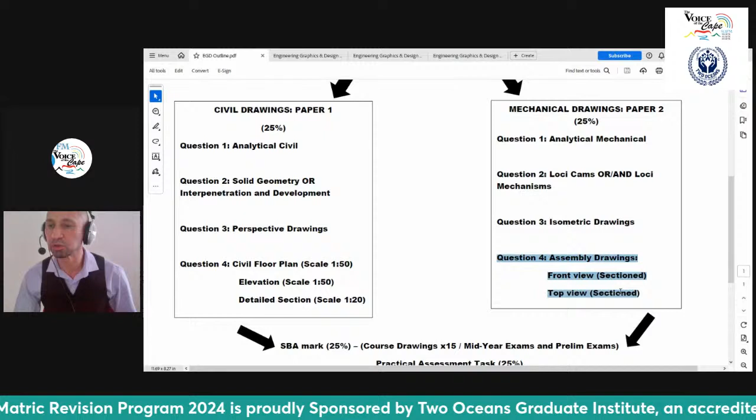which is also just short of 45% of the paper. So it's very important that grade 12s must engage with this particular question and spend at least an hour and a half on this question because of the magnitude of the mark that we have in this particular paper for this particular question.

And you will see you can either get a front view, which is going to be section, and then there will be either a top view, or it can be a front view with a left view, a front view with a right view. So mostly, if you look at papers, there will be two views asked, either a front or a top, or front or left, or front or right.

Very seldom will they ask three views because it takes up quite a bit of time for you to be able to do three views. And if they do ask three views, then of course the drawing will be much simpler and you will only have one cut section. So today we will sample one of the drawings. So I'm going to just go and touch on isometric drawings first.

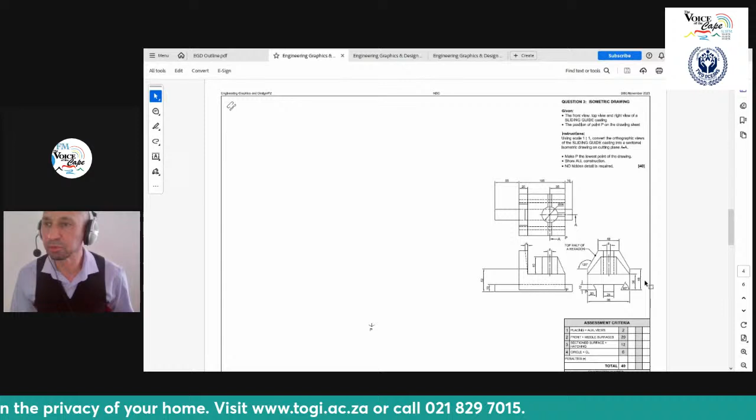So I've taken this particular isometric drawing, which is from 2023, which is last year's paper. Now, if you look at the drawing that was asked last year, I want to read the information to you so that you can merely skim read tomorrow, because the information in the instruction is pretty much the same. So you don't need to do hard analysis once you have done maybe one or two of these in the past, or do it as a revision.

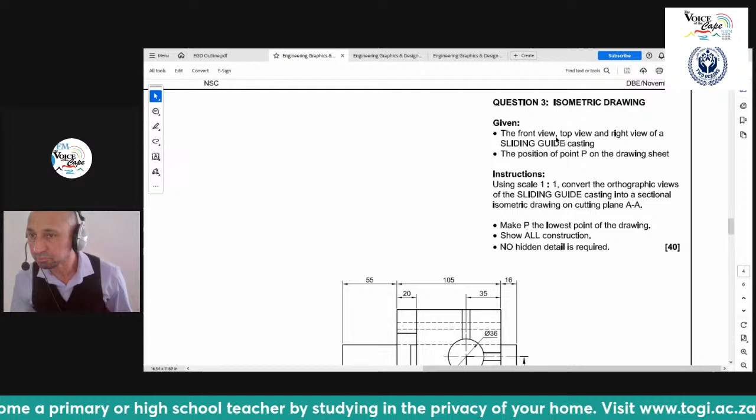So what is given to you, and please analyze that there's a front view, and you need to know where the front view is. This here, learners, is the front view, and I actually want to sort of label it there that is the front view, because this is how you are actually going to ensure that you understand it well. So that is your front view that you will see here. And then, of course, you will have a top view, which is this over here.

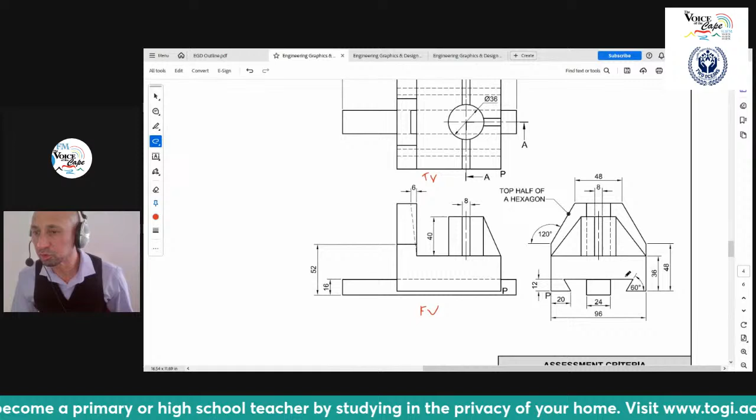That's your top view, because it is in third angle orthographic projection, and it means that the top view is actually at the top. Okay, so that's your top view that you will see here. And then it says here there is a right view, which is on the right-hand side of your front view. So that here will be your RV, which is your right view.

And for you to understand it like this, it gives you some sort of an idea of what you are busy with and how perhaps the different parts are formulated, so that you can unravel it and be able to put it in a drawing. And then it continues where it says here, it is a sliding guide, of course, a casting. And then the position of point P has been given to you. So you're going to find point P right here at the bottom. That's where point P is. And you can see there are starter lines.

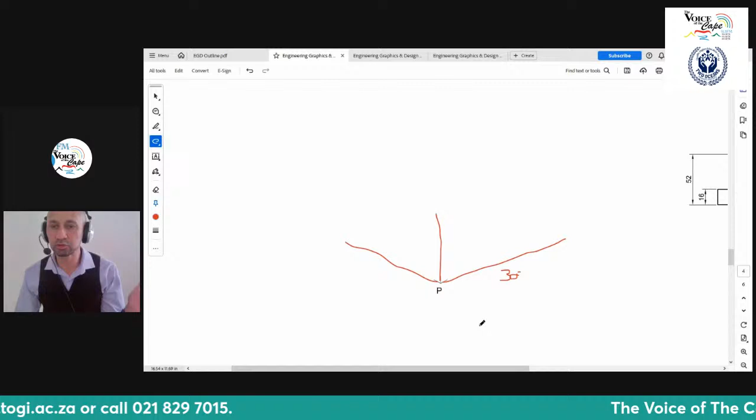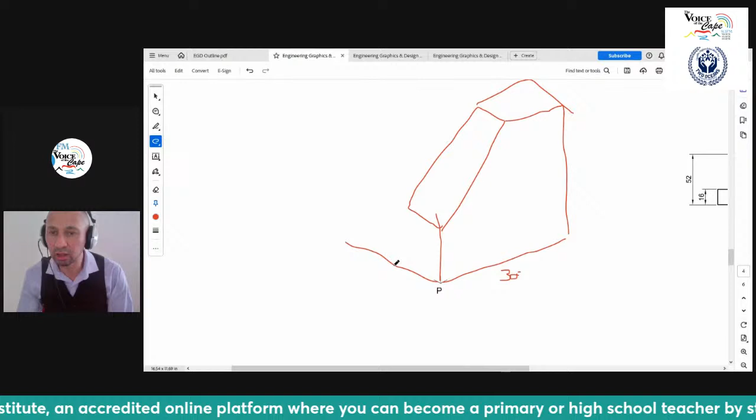Now, the wonderful thing about isometric drawings is that the lines can only go to the right at a 30 degree angle, or to the left at 30 degrees, or straight up. So those are isometric lines: 30 degrees to the left, 30 degrees to the right, or straight. In very odd cases, you're going to have non-isometric lines where you're going to have slants, for example, which I'm drawing right here at the moment. That is just a sample. So all these lines are all parallel, either to the 30 degrees that way or 30 degrees this way. And then you will have the non-isometric lines, which you will see here. Okay, so that is basic information that you need to know.

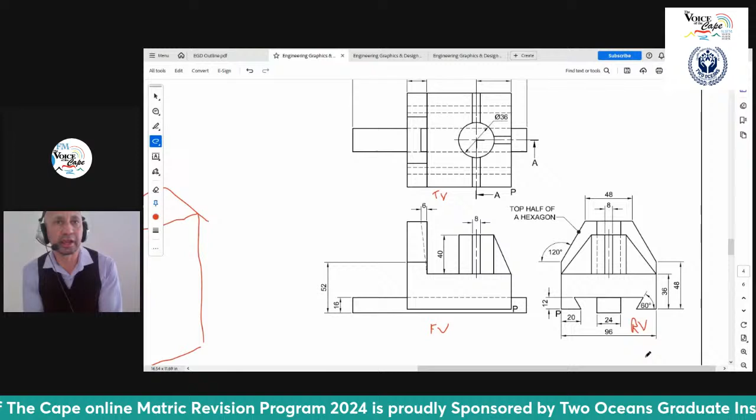Now, if you look at this particular drawing here, don't just start. Please look at it, analyze it, make sure you understand it really well before you actually start drawing. It is important for you to plan this drawing for at least 5 to 7 minutes, and don't rush it. And when you do the planning of maybe between 5 and 7 minutes, even up to 10 minutes, and you understand what needs to happen, then you will make up that time drawing it, because you know exactly what to do. And your planning can even be sketching.

Make a little sketch here, and you don't even need to erase it. You can just leave it there, because we understand as markers that learners do planning on their page and they can't take extra pages into the exam. So if they do a bit of rough sketching, maybe here on the side, we understand that. We're not going to mark you down for that.

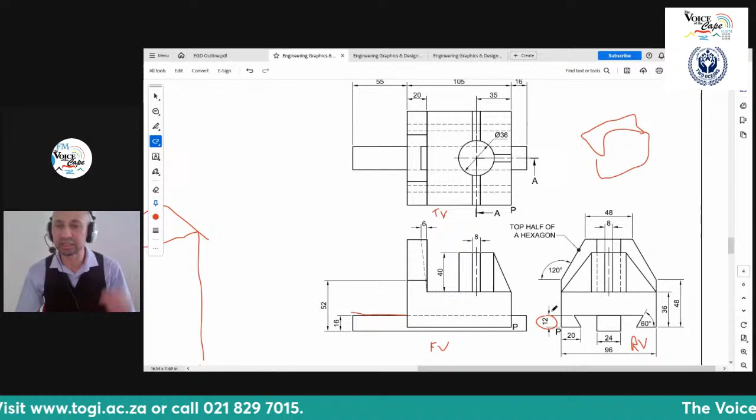What is very important is to look at the different dimensions, as you can see here, and analyze the different dimensions. Sometimes you will need to look at this dimension over here from here to there, but you won't find it here; you need to scroll up and make sense of the dimensions that link up with that specific part. So it's all about coordination. Anything that you can't find here must be transferred from maybe this view, where you will see that that part there is in fact 12. And the arrows will indicate exactly where it starts and where it finishes.

Okay, so that's important. And you've got to make the correlation: there is an upright part here, which is that part there. You can obviously just sort of break it down as a base there. There's a base, which is this base that you are going to see here, right? And I'm not even doing the insert parts. And then there's an upright part that you are going to see here. But if you view it from this side here, that upright part actually takes the format of a hexagon. And there it says top half of a hexagon.

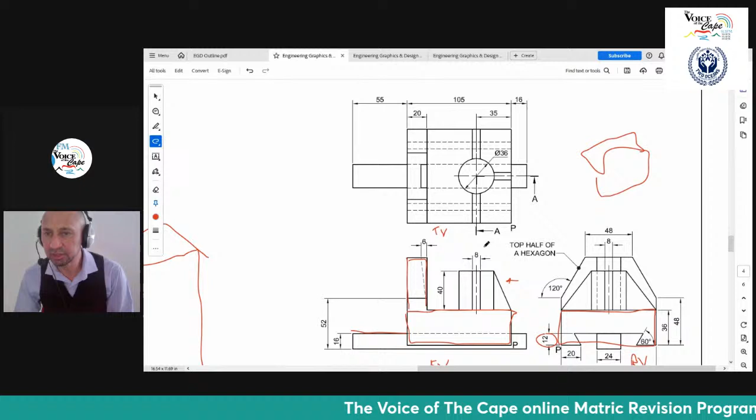Then this part here, as you can see, will be a circle. It's a cylindrical shape here, a cylinder. And it has these attachments on the side and the front here, which are the support structures, ultimately called a web or a rib, because it serves as a support structure. You will see a dash line here, and then you will of course see that there's a little slanted inside part here as well. Then you see a whole lot of dash lines here. What are those dash lines?

If you look at these slanted sections here, those are the slanted sections that will serve as those dash lines in your top view. So you've got to make sense of that.

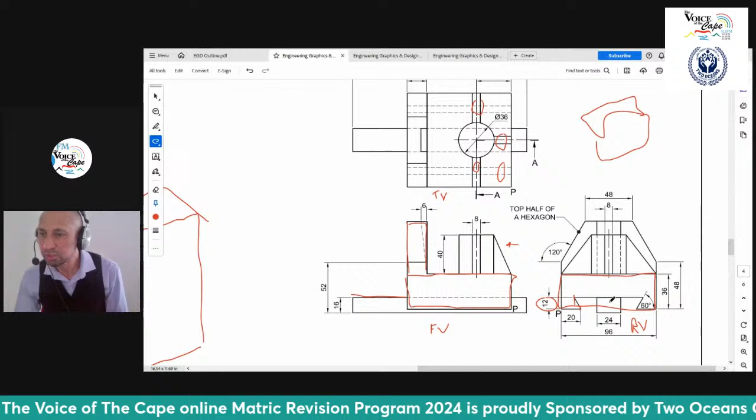And then there's a bar at the bottom which is attached to this component here, which basically means that this bar is 24 in width and it has a height of 16, and it runs underneath, and, as you can see here, goes past the actual base and comes out the back quite a lengthy distance of 55. So you've got to make sure you understand the actual item that you need to draw, and maybe make a little rough sketch of it.

Even if you can't draw it properly, a rough sketch allows you to get a bit of a kickstart so that you have an idea of what to do to draw the base. And then once that drawing is in motion, momentum will kick in. And that momentum would be that the lines will actually guide you, and eventually you will have a completed product.

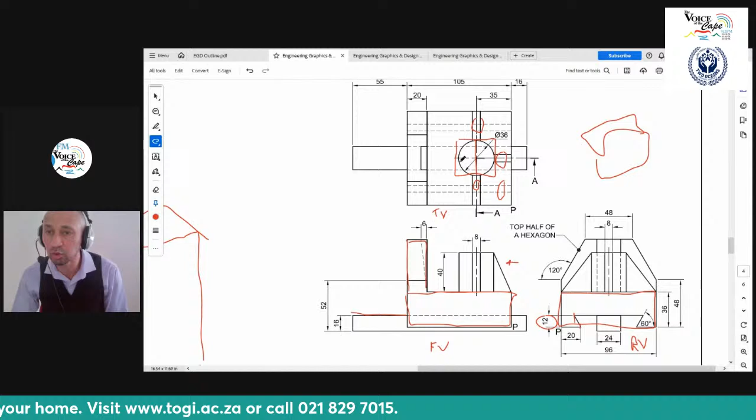That's a higher order. You also need to know how to draw an auxiliary view of the hexagon, so that you can import it, because they don't actually give you these distances over here. So you are forced to do an auxiliary view. And for the auxiliary view, you actually get marks as well. So that is important. And then lastly, the third item would be these slants that actually have degrees to it.

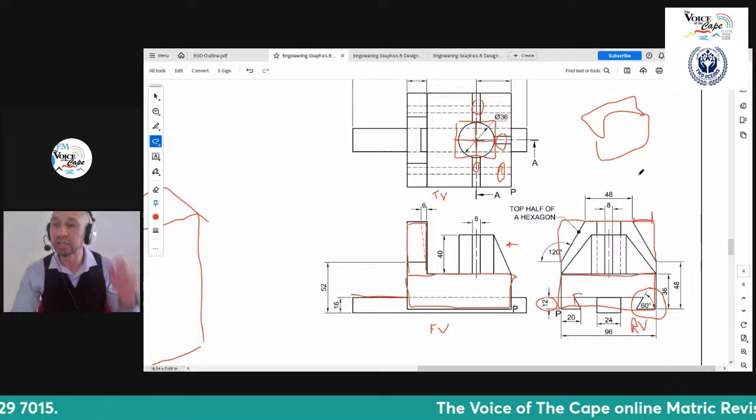So they don't tell you how much that distance is, but you've got to work it out graphically. So you've got to draw that part as part of your auxiliary view, which you're also going to get marks for. So remember, the circle, the hexagon, and an angle. Those are 3 important things that I advise you to please go through and find in a drawing, because those will be evident in your exam coming on Wednesday.

Let's take a look. I'm going to stop my screen and share the way the drawing is done, so we can see the construction of the isometric drawing. I'm just loading it at the moment. There we go. It loads perfectly, it just takes a little bit of time. And now we have it. Let me just enlarge it so that we can see what we're actually doing here.

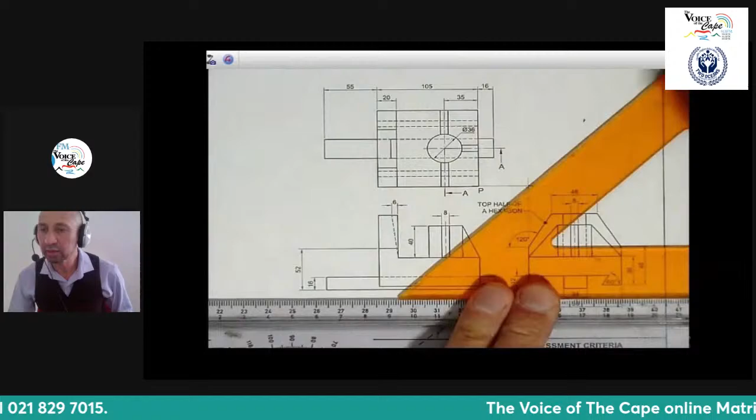So if you look at the drawing, what I do when I start, and this is the planning I'm talking about, is ensure that you understand what the different parts are and how they correlate with one another. So I have a tendency to do this planning before the actual testing of this particular drawing, where I just draw certain parts up and make sure that they link with one another for me to be able to get all the dimensions.

So you will see here, I draw all my lines up onto my 45-degree line, starting with the most outside point, just for an easy way of understanding it, and to make sure that I have my measurements right where I need them. So that's the first part. And then what I am going to do next is actually start my drawing. I would advise you to do that as well.

After that, I'm drawing my 3 lines, and there you will see that I'm doing my dimensions for my base. And here you will see that I easily construct my base. There we have it. So can you see my height now has been determined from my base? There's my width, and that's my length. Now, very importantly, the orientation of the drawing is very important, because it counts for 2 marks.

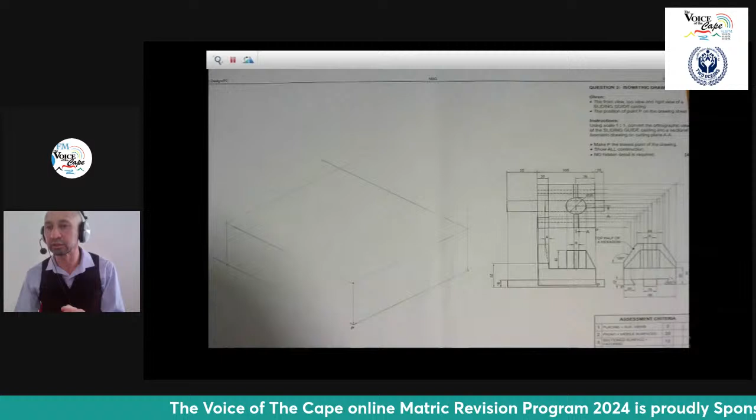If you orientate it incorrectly, then obviously you will not be allocated 2 marks. So in this particular activity, where my cursor is now, that is point P. So you're going to make sure whatever's on the right of point P is going to be on the right here. Whatever measurement is on my left of point P will be on this slanted 30-degree section here. Okay, so that's very important.

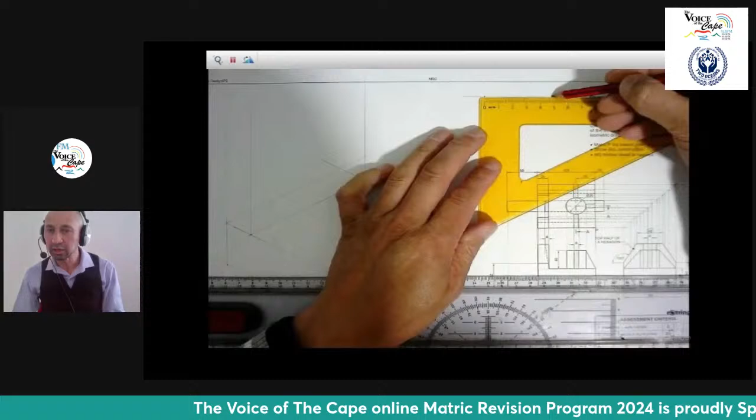And there I've drawn my base. And now I manipulate it. Now I'm going to draw the wall at the back here, and I'm not going to draw it immediately as a hexagon. I'm going to get my thickness, and there I draw my lines up like that. But I can't conclude the top, because I don't know what the height is. And that is why the examiners force you to actually draw the hexagon.

So now I'm going to find a blank space over here, or anywhere on the page where I can draw the half hexagon, right? And they give me one side. There I do the one side, and then I can easily check my angles. Look how I check my angles. My angles have been checked, and there I am drawing my half a hexagon. I take the same side which has been offered in dimensions, mark those two sides, and there I have my half a hexagon.

And then I'm going to box it. As you can see, I'm boxing it. Why? Because I need these omitted sides here. So that is 48, which means the two sides here will be 24 and 24. As I measure, 96 is my whole length. And from here to here it is going to be 41, and 96 over there. Now I have all my measurements.

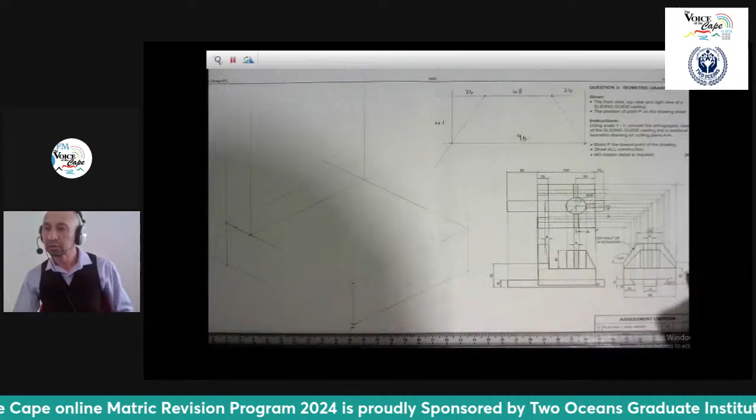Now I'm going to import it. You can see here it has a height, which I'm going to import it on, and I create my height, which is 10 millimeters. And then on top of that I'm going to add my box first. So I'm going to draw my 41 millimeters up and draw it as a box first. Here you can see my box format. Let's first stop at the box.

Okay, there's my box. And now I'm going to take my 24 from the sides and just slant it down as I have it there. Great stuff. Import it onto that space over there. You will see it all comes from my instructions and my drawings. That's the 24 that we have here, the 24 that we have there, and the 41 from here up till there. So that has been imported.

Now you can see how I import the hexagon. That's the first higher order part which you have completed. The rest of it is just standard things that we have to do. We're going to continue. There is, however, an insert, and that's going to be in the middle. You will see I've created the distance by getting the half, on both sides. Here's my insert part which I've created.

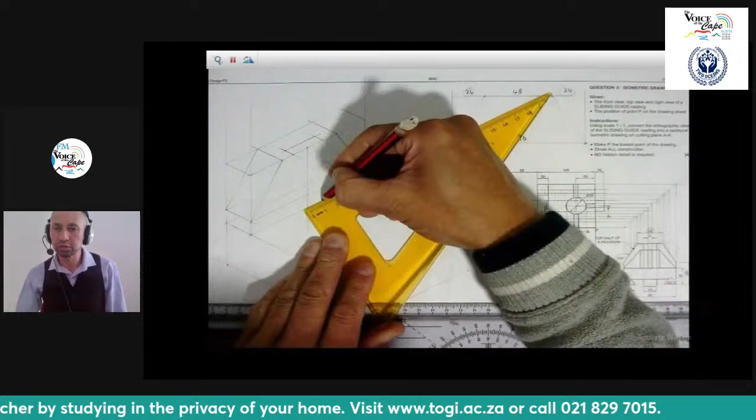And now I can bring my center point down, measure to the one side and to the other side, and then simply draw the slanted section in from that corner as it is indicated in your top and front view. And there we have it. Easy as that. There it slants down. Of course, that part will not be seen because it will be covered by that corner, but that will be seen. There's my insert part. My hexagon part is finished.

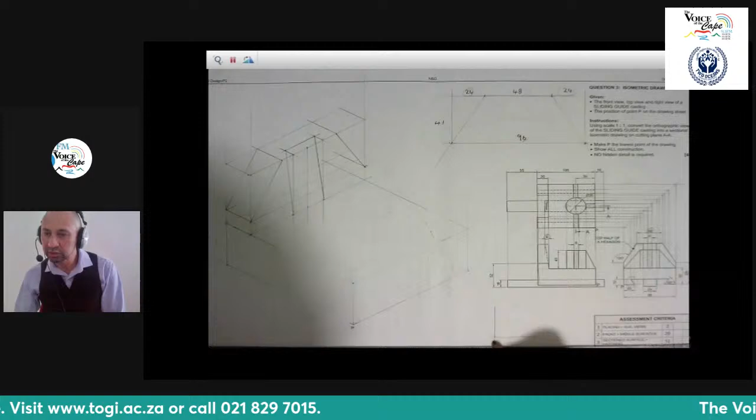Let's move along. Now I'm going to work on my bottom section here, which has the two slanted sections. Here you will see I find myself a blank spot and draw that auxiliary part there. That auxiliary part will tell me it is a particular distance in height, with a slanted section of 60. Once I do that, I can easily determine the distance between that point and the slanted section. You can see in the video how I do that.

It's measured, and there I write the distance down, which now can be imported again onto your actual drawing. And that's a very important part of your isometric drawing, to be able to do that.

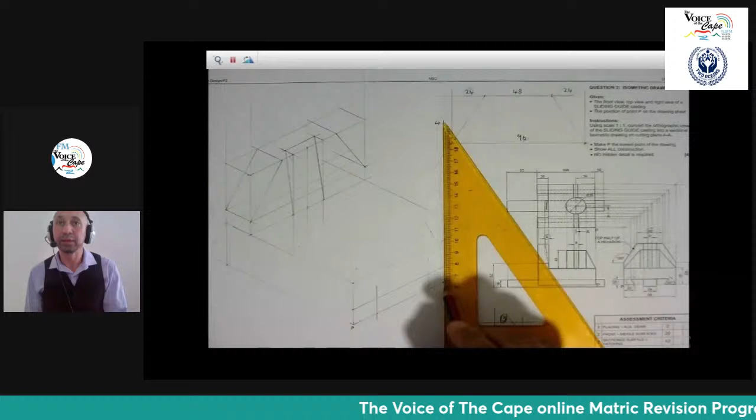But let me say, hypothetically, should you not be able to do that, you of course can play the guessing game, right, by just doing a slant. We're only going to penalize you on the one side because you have incorrectly drawn the line to the wrong point and the angle is wrong, because you haven't established what the angle is, and that would be the reason for us not allocating the auxiliary mark and the wrong mark on the drawing.

But because you repeated that on the other side, we cannot penalize you twice, and we will reward you with the incorrect one on the other side. Just keep that in mind, because all of this would be positive marking, and it's based on that analogy that I just indicated to you.

So now I'm going to box that, and then I'm going to apply it by importing this into this space over here. And now you will see there's my measurements on both sides, and I'm simply going to slant that like that. And I'm keeping my drawing faint. I'm not drawing anything dark because I need to also look at my cutting line a little bit later on.

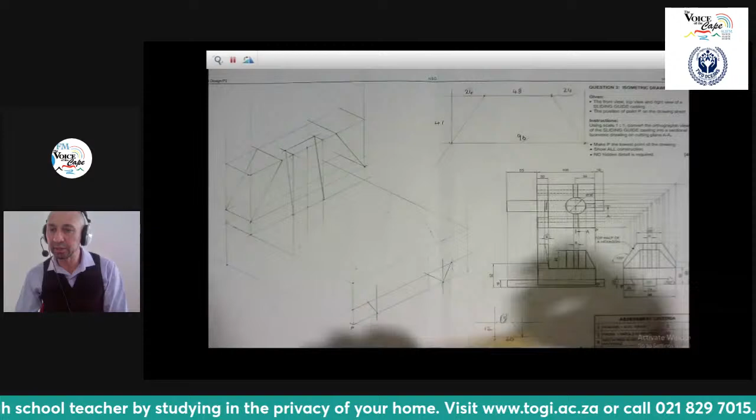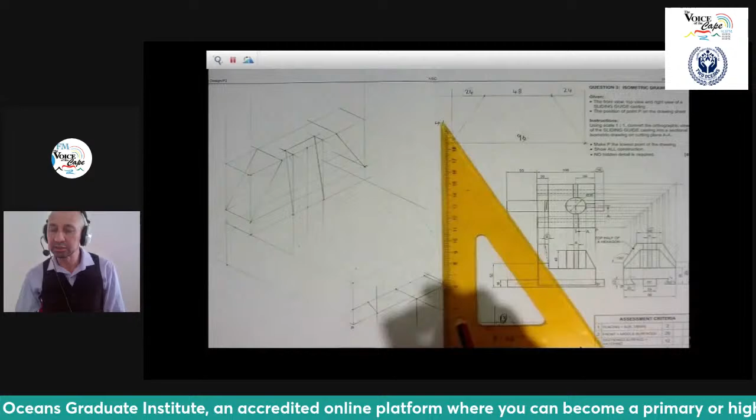Then, learners, my main focus now is going to be on the base part, the solid piece of square rod that runs at the bottom. So I created my center point, and it's 24, so I go 12 and 12 on the side. I extend those lines further, as you can see, and that length there is also 16. Measure my 16 in front, and then just block it the way it is, 16 down, for you to be able to get that little part that comes out in front, as you can see in my drawing.

Nice and easy. So there we have that front part, right? 24 out, 16 drop, and it disappears underneath this base part. But of course, it comes out on the other side. So you've got to make sure that at the later stage you will have this lengthy part coming out on the other side by adding all of that, which is going to be 176.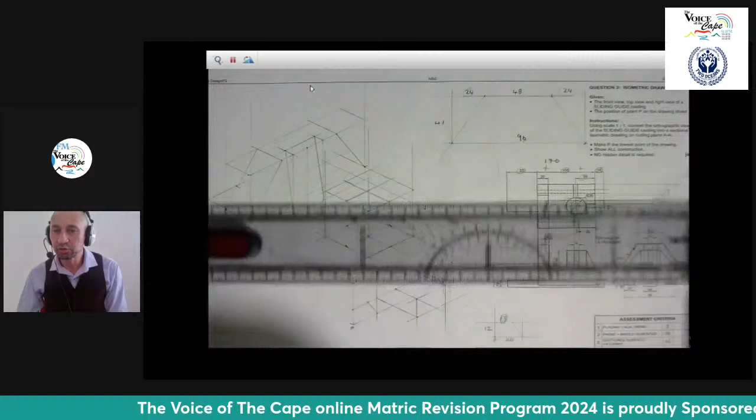And then you will have those projected up, which is the box, so that you can do that same construction at the top. So you're going to have that construction at the top there. There it is. And then, of course, you're going to do the construction by connecting the two acute angles and opening up a V-frame from one of the obtuse ones, like I'm doing in the drawing now. And this is the construction that you've done since grade 10, which you need to know.

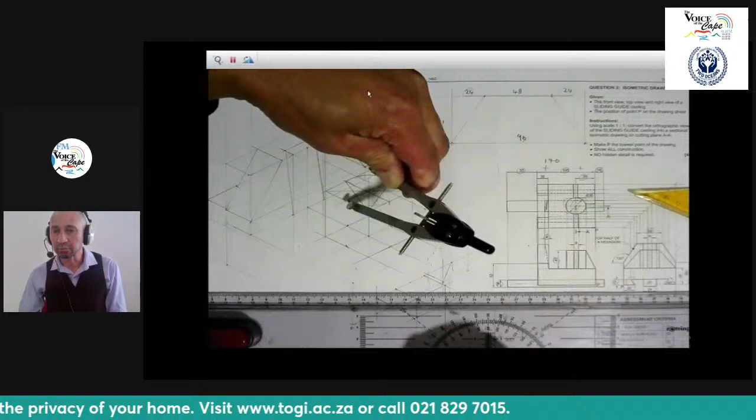I'm going to open it up like that, and I'm going to draw one side of my circle, which is my isometric circle. So I'm going to draw that side faintly and go to the opposite side, and I'm going to do that as well. And then my shorter sides of my circle, because you must draw an isometric circle in 4 parts, as you've done before. There it is.

And then, of course, the other side you're going to do. And there you have a full circle. Now you must just project those things down, right? You're going to project that down so that you will have the bottom section as well. Then, of course, the support structures must now come in here. After that, you'll see that I'm doing the very same thing at the bottom by drawing a double circle like that. There we have it. And then I will connect the sides, as you can see, which I've done.

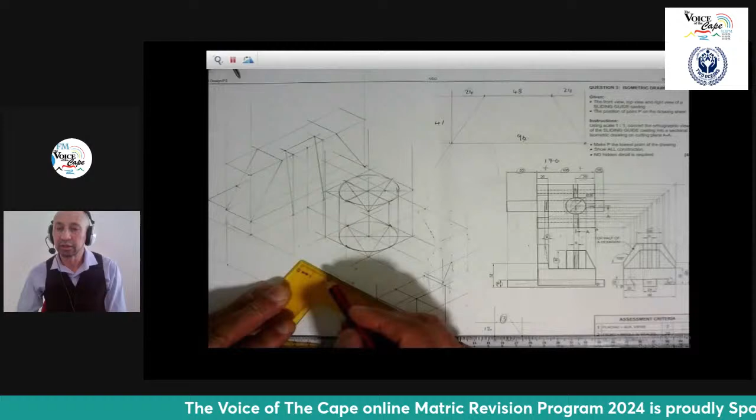Now, certain parts will appear as dark lines and others will not appear, but you have the construction there as well. Now I'm going to fit in my 3 ribs, my support parts, which are my ribs or my webs, as the mechanical term calls them. And it slants from the center of that circle, which means that if it's 8 millimeters, you go 4 and 4; whatever the measurement is, you go half and half. And you go down and it forms that sort of triangular shape there.

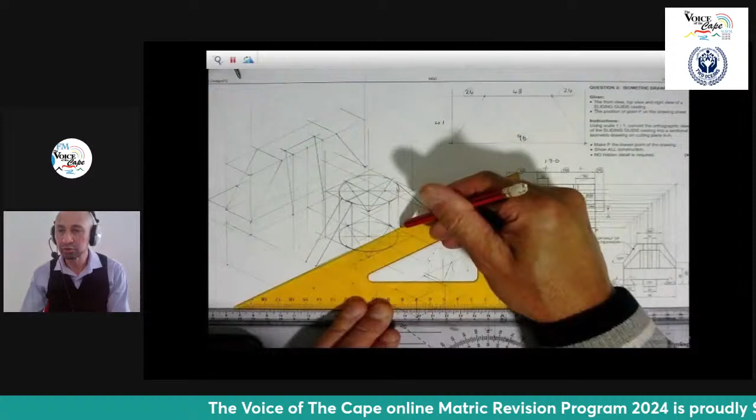And then you do the exact same thing on the other side, creating the centers first, and then the half on both sides of my centers, allowing me to form the rib there. And then I'm going to do it in front. Now, of course, when you do that triangular shape, there are corners that form right here on the side and at the bottom. And here I'm doing the front one. Both dimensions are given, and then I do it on the left and the right of my center. My corner forms here, and there's a corner forming at the bottom as well.

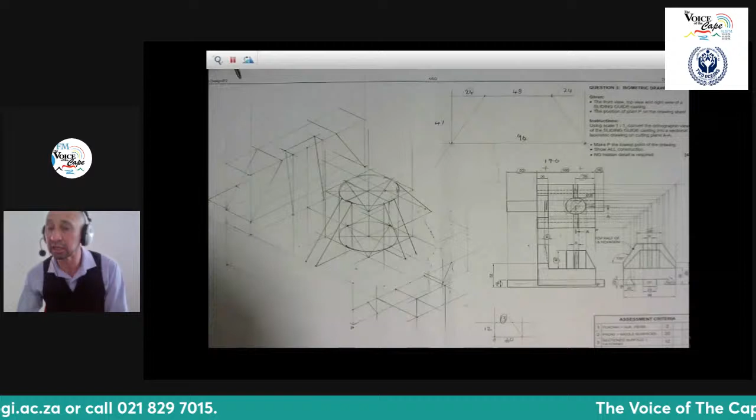And now, guys, there I have my entire faint drawing. Now, before I can darken it, I have to take into consideration that in this particular instance, there's a cutting line. I'm hoping the exam is not going to ask for a cutting line, because a cutting line sort of intensifies the drawing. It makes it more exciting, but it also makes it more difficult, and more analytical knowledge then needs to come in for you to be able to do the cut. So I'm hoping that you're going to have one without a cut, but in this case, let's prepare for the worst. There is a cut: a quarter part of that circle will be cut out, which is indicated in my instruction.

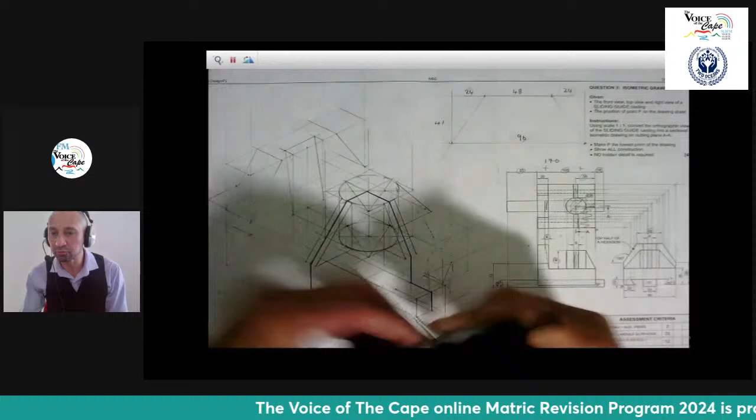And now I'm simply going to draw in my cut section. You will see I'm darkening everywhere I'm going to cut right through. And I'm just going to stop it in a moment to show you how I do it, just before I do the hatching. You will see here that the cut is being done and it's perfectly in the middle. And I'm now creating my lines for my web, and I will explain that after I've completed that line.

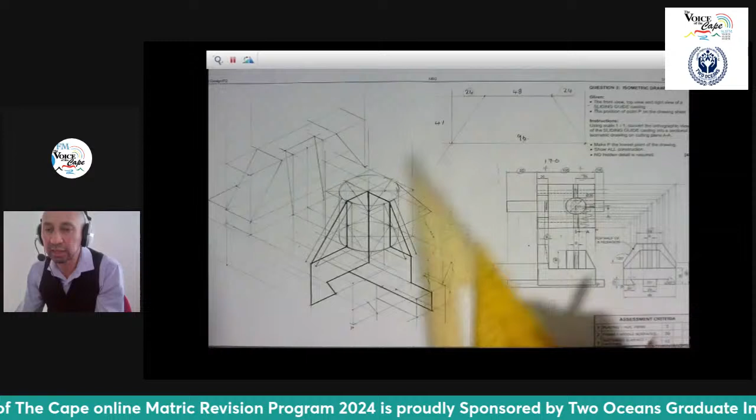Now, you will see here, learners, the cut is perfectly in the middle of my web. A quarter of the circle, perfectly in the middle of my web, and wherever there are corners, it goes down right underneath. So that's the part that's been cut and taken out. So you need to show that, and by showing that, you also need to hatch it. So we're going to have a hatching that goes to the one side and a hatching that goes to the other side. All right, here we have it.

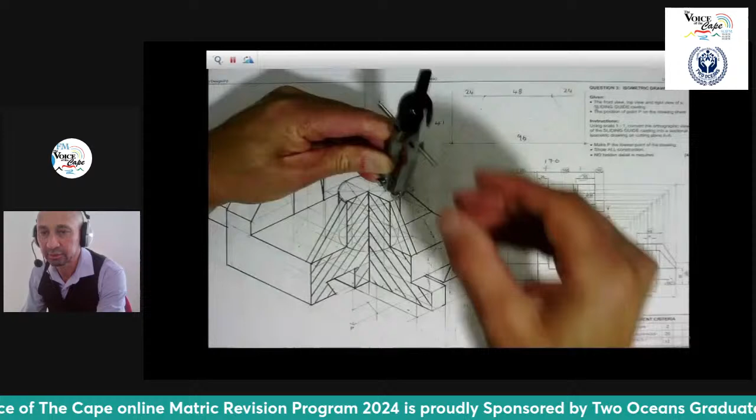And then the remainder of that circle will be there, which I have darkened. And then I'm going to add all the other dark parts of my drawing very quickly, as you can see here, because the cut section has now been completed. And I simply add my dark sections like that. Okay, just to stop it there and show you what it looks like right at the end.

Just to complete little bits and bits of touches on this drawing to make it nice and perfect. And there you have your drawing. Now you can see the part has been cut out. That's the remainder of it.

Right in the center there, you will have how it goes at a 90-degree angle. The hatching goes this side and the hatching falls that side. It cannot be the same, because you will be penalized if you keep the hatching the same, because it's two different surfaces.

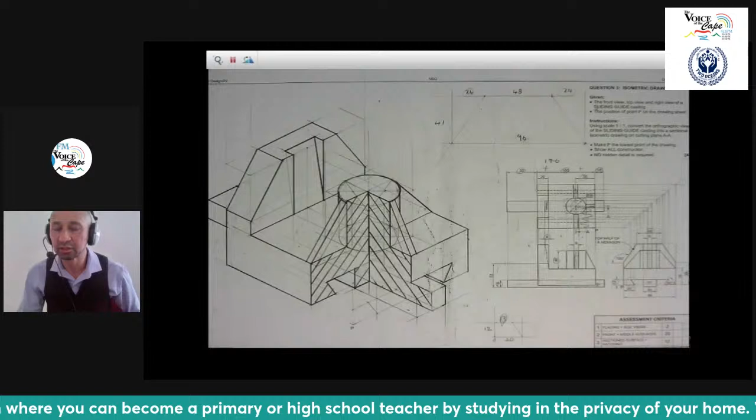Half of my web remains both here and in front. That is untouched. Everything else is untouched here. It's only this part where the cut section has been implemented and where the cut section has been removed. And that is the detail of that cut section. And that concludes this particular drawing before I go on to the last one.

But keep in mind, grade 12s, that it takes a bit more thinking and planning when you are going to execute the cut section. So you have to draw everything so that you see the whole thing first, and then you apply the cut section. And in this case, you can see how I applied it.

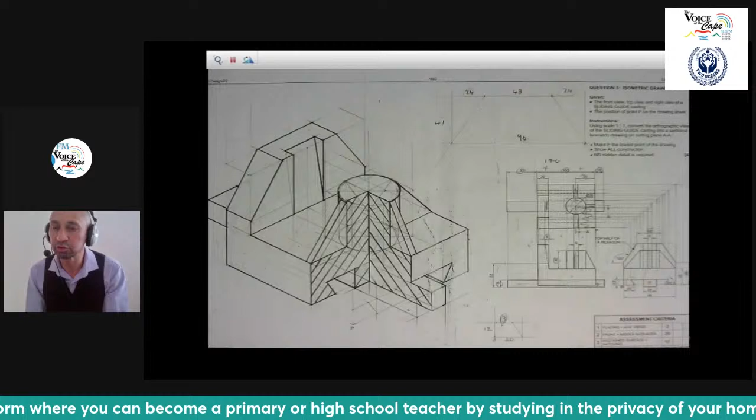I took my lines onto the specific sections that will be cut in the middle, right down as the surfaces are sort of panning out, whether it's vertical or horizontal. You take it down and you draw that dark first, and you ensure that you add the cutting line to show clearly the cut section.

And guys, experiment with it and see what you can come up with, even if you maybe get some of the parts incorrect. So long as you attempt it, there will be some marks embedded in the drawing that we will be able to allocate to you. All right, so that concludes question number 3.

I want to touch on question number 4, which is the assembly drawing. So I'm just going to stop my screening right here for this one. I'm just going to remove that quickly, and I just want to present to you which assembly drawing I'm going to be looking at. So I've taken this particular assembly drawing.

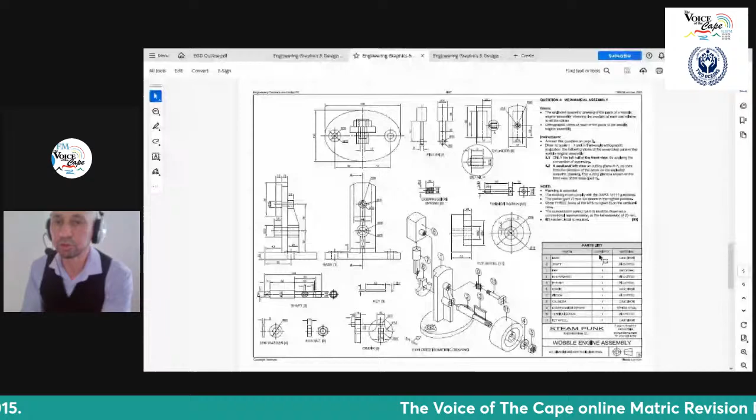This is question number 4. You can look at the mark magnitude. It's quite a big chunk, 93 marks, and this was the paper of 2022, 2 years ago. This was the Matric paper that they wrote in November. It's quite a lot of information that goes on here, but I want to show you technique. You must be able to execute the drawing because all the dimensions are here.

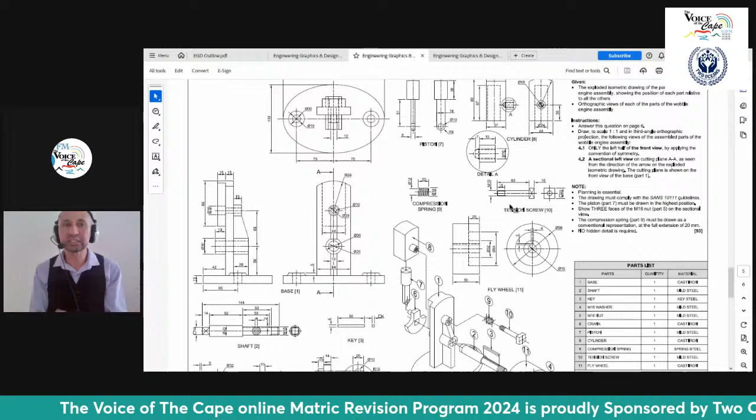But if you look at this page, it can become very despondent. Why? Because there's a whole lot of things happening here, and the brain is such an organ that as soon as there are too many things on a page, it shuts down. It just doesn't want to continue, and that's the time when you say, no, I'm giving up, I can't do it. But you've got to stay in the fight. And when I say stay in the fight, I mean that you need to analyze and read.

And let me read this to you. This is what you're going to do in your exam, because this is all about technique. You read here and you mark, and I'm going to show you exactly what you need to do. So you're going to read here what is given to you, the exploded isometric drawing. So you underline it. A part of a wobble engine assembly showing the positions of each part relative to all the other parts. The exploded view.

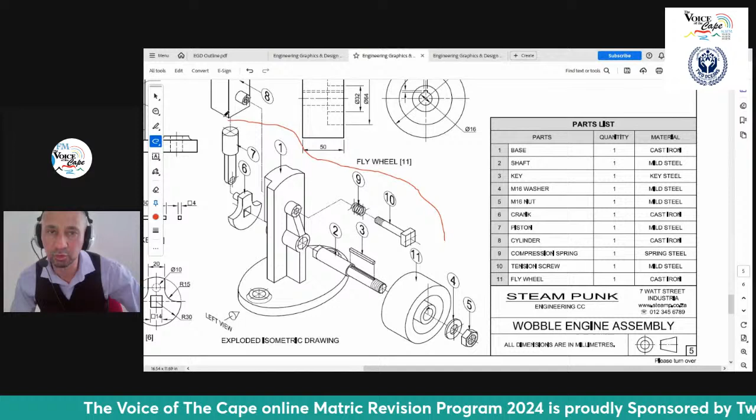What is the exploded view? You take your pencil and you mark the exploded view, which is this here, the 3D exploded view. Hold on. You just take all of this, that entire exploded view, and you go up here, and let me just make that a little bit smaller so that you can see what I'm doing. And you put all of that in a box like that there. That's your exploded view, and it will stay here.

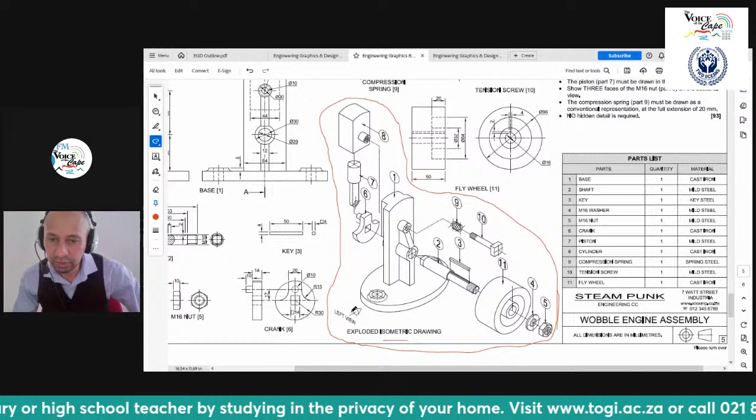Please take note of this, which is your left view there. That's your left view. Okay, there it is. Take note of all the parts that face the left view. So if that's your left view, then that there is going to be your front view, because this is on my left hand side and that's my front view over here. That's how you need to know. And all the surfaces that face your front view. That's what you need to understand from this exploded view.

Then further it says here: orthographic views of each part of the wobble assembly. So all the parts are here, and you will see here, there's the part, and you can do a part check.

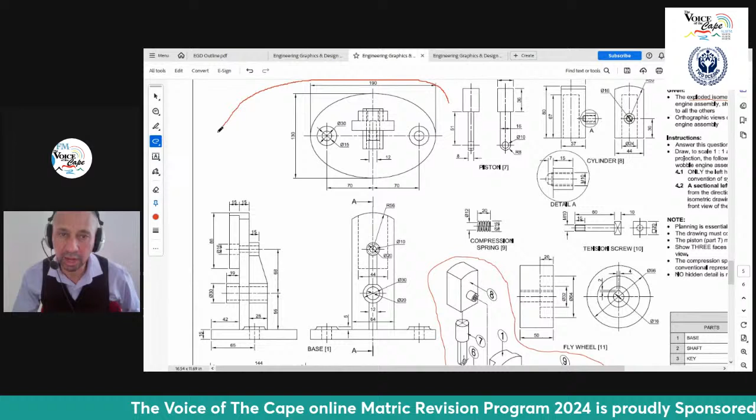Now, when you do a part check, you're going to say the following. Let me make this smaller quickly. There is a base, right? And what you must do is take your pencil and put the entire base in one cubicle like that, right? There. Now you know this is the front of my base. That's my front view of my base, right? This is my left view of my base, and this is my top view.

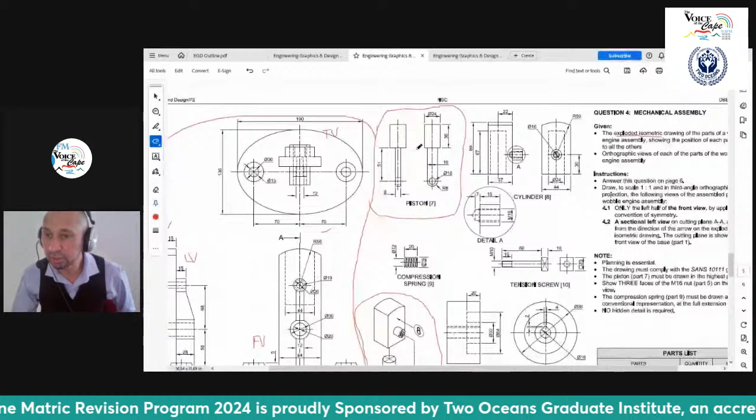But I'm not going to draw a top view. They're just giving it for the dimensions because they don't tell you what it is here. You are only going to draw according to your instructions. Piston also in a cubicle. These are not two different drawings, it's two different views. Then you are going to have a cylinder, right? And there's a detail of a particular part of the cylinder. You're going to put all of that in one box. That is the cylinder, it's one component.

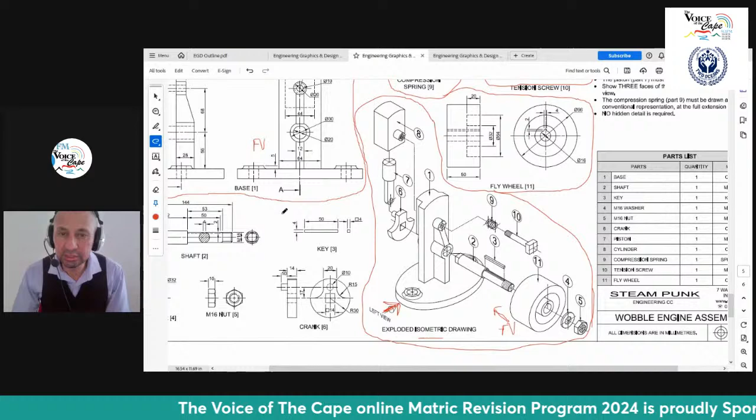Then you're going to have here a tension screw. So you're going to put the tension screw, both views of that, in a box. Then you're going to have your compression spring in a box. Then you're going to have your flywheel in a box as well, right? All separate components, separating them. Then there's a key. There are two views of the key. This is the one view, that's the other view.

And then you're going to have your shaft. There's your shaft in a box. You're going to have your washer, which is an easy component, and you have your nut there. And then lastly, there's a crank that you will see here, also put in a box. Now, if you do it like that, things are becoming more clear, and there is a certain order that you are working with. You know that every time you're going to draw something, you're going to tick off this box here, or you're going to tick off there.

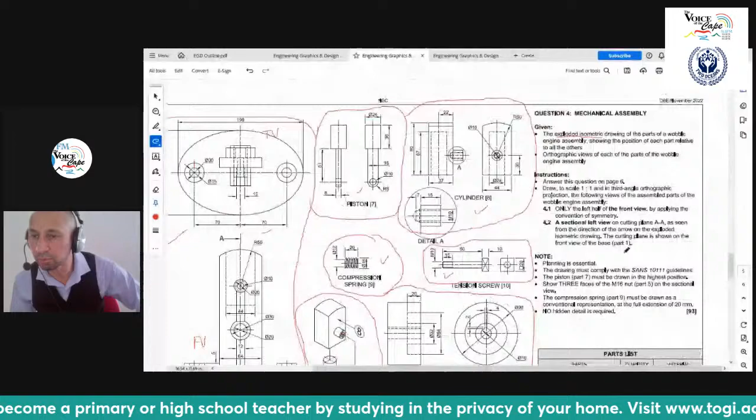I've drawn the base, I've drawn the piston, I've drawn the cylinder, I've inserted the tension screw, I've put in the compression spring. You've got to make sure that you know that. Okay? And this is also part of the planning. And then what you do is look at the instruction, because they say here you must draw to scale 1:1 on page 6 here, which is your blank page, right?

You must draw only the left half of the front view. So if this is your front view, you're only going to draw the left half. That's the left half. This is the right half. No, the front view is here. Sorry. This is the front view. It's symmetrical. This is the left, and that is the right. So you're going to draw the left side, which is everything from the middle, cut down here. But this side you're going to draw.

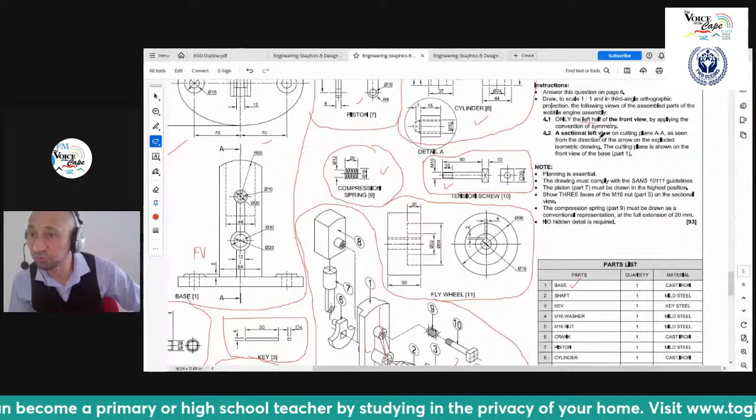And then you're going to draw a sectional left view, right? A sectional left view, which is this view over here, where you have a cutting line through everything to show how the components fit together. And that takes a special type of skill, right? So it's all loose components which you're going to put together, but you're going to put it together part by part. And that's why you need an hour and a half for this. And then it says clearly here that you need to do planning, which is essential.

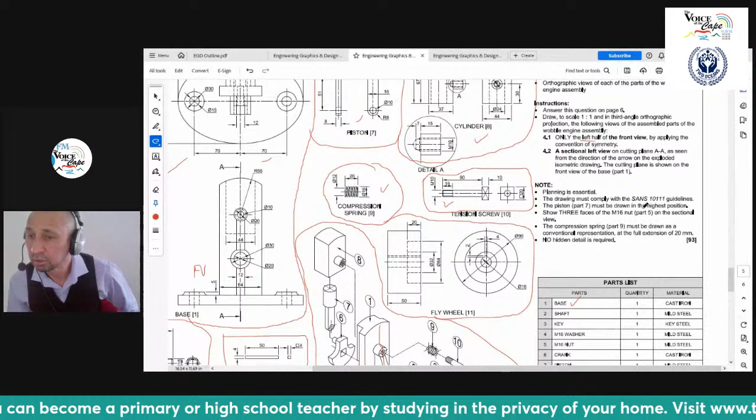You need to draw and comply with the SANS 10111 guidelines. They say that the piston, part 7, must be drawn in the highest position. So that's very important, in the highest position. And then you need to show 3 faces of your M16 nut, which is part 5. The compression spring, part 9, must be drawn as a convention.

Now, the convention means that they show you how that is there as a picture, but the convention means, and I want to draw it here, a straight line there, a straight line here, and then, of course, the slanted lines in between, and then a center line in between. That is what they mean by convention. Okay, that's how it must be drawn within that space of 20. So the space from here to there is going to be 20. And then lastly, they say that no hidden detail is required. So you don't need to worry about your hidden detail.

Now, when you draw a front view in this case, and it's only going to be half of the front view, you only draw the things you can see from the front, which is only the half part of it. And I'm going to show you now what happens.

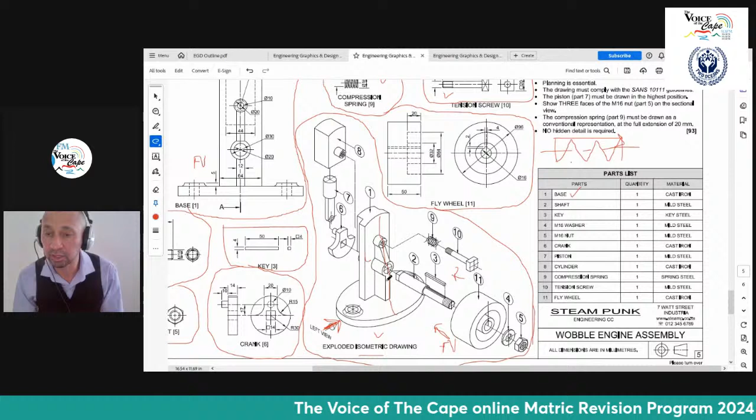And then once you draw that first, put everything together, even the nut, and the nut is an important construction which you need to know. And then you're going to draw the left view, and you're going to cut it, and you're going to section it. So that's basically what's going to happen. Let me show you how this drawing unfolds.

All right, I'm going to stop. Just bear with me very quickly as I load my video file of an assembly drawing. Because it's a big video, it takes a bit of time to load onto your screen. 5, 4, 3, 2, 1. I want to show you how this drawing is going to be put together. Give it a few more seconds, learners. Just having a bit of trouble loading it. Let's try again. It's going to be the assembly revision.

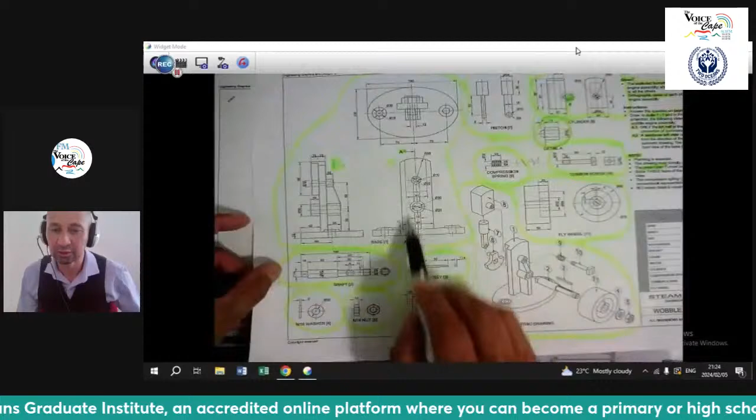So now you can see here, learners, what did I do? You can see how I actually have this all in green. My front view, there, it's all in green. I've marked it. Now I'm going to analyze. And you will see that I start with a line at the bottom, and I'm going to draw a line halfway. And everything on my left of that line will be drawn.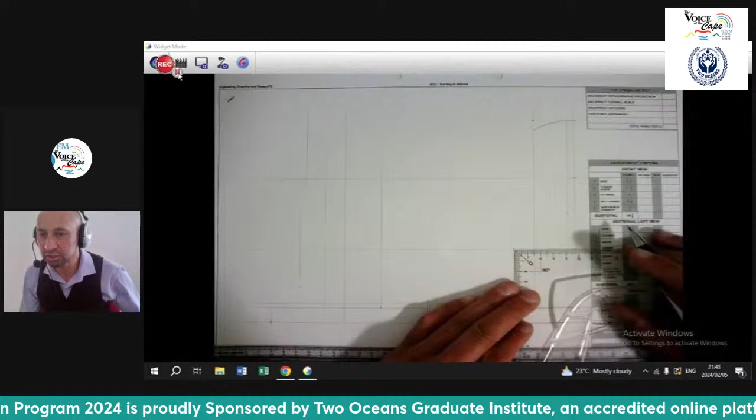I measure it out, and then I'm going to do all the construction of my base plate, as you can see. And I put in all my different components, which is my nut and my washer, and my wheel I'm going to put in, which is going to be there. So just to show you here what happens.

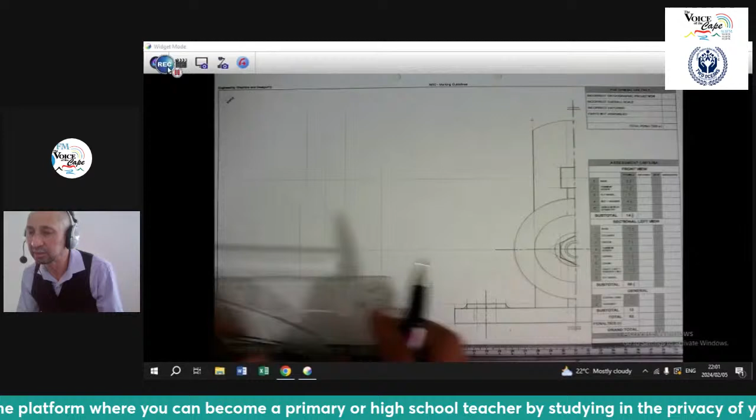So here you will see, learners, that I've put in all my components that will compile my front view, which is only the half. So I draw a center line in the middle there. I've done quite a bit of space planning, allowing me to just draw this part close to my rubric over here, and then I only draw my half.

Now, if you draw the full section, and you go over the writing part and the marking section, we don't have a problem with that. We're not going to mark you down. If you can't draw half of it and you're only used to drawing it in full, that is perfectly fine. We're just not going to take the part that's not supposed to be there into consideration when it comes to marks. We're only going to mark the half that's according to the instruction.

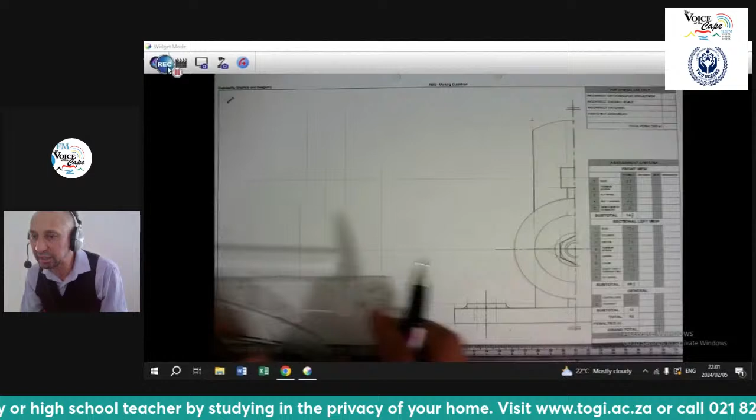So it's simple for you to be able to use the dimensions and to draw it like this. And you can see I work with center lines. Everything revolves around the center line. It's halfway this way and halfway that side. And everything is according to a cross where there are center lines, and everything happens around a center line, which makes it very easy for you to draw.

And once I have that front view, now I'm going to proceed to my left view, and I'm going to simply just start with my base. And just to show you, there I have my base part. First part is done. Here's my base. Just to show you what the base looks like. That's my base.

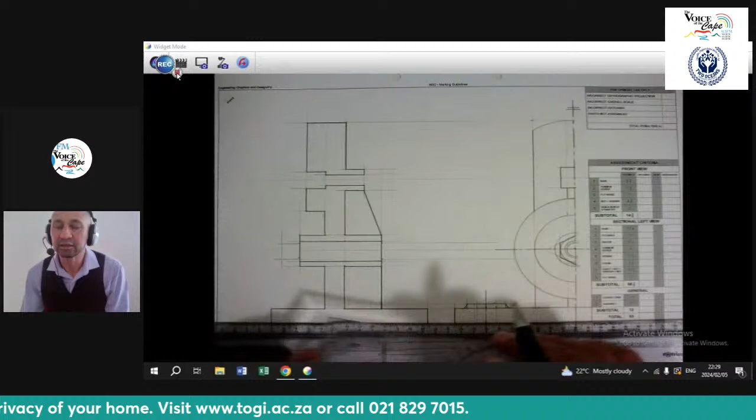You can see I leave a gap open there because once you have drawn your base, that's the part that you start with, which takes a lot of time. The rest of it just slots in. So you're just going to slot in the other components inside the base. So you will have, for example, the shaft that goes in there. There's the shaft. And then you will also have the pulley or the wheel that will go on there.

And inside the pulley and the wheel, there will be a key that will be shown to allow momentum from the shaft onto the pulley. And then I will have my washer and the construction of my nut. And you can see how the construction of my nut would be from my front view, using my circle template for the little corners and the arcs of my nut.

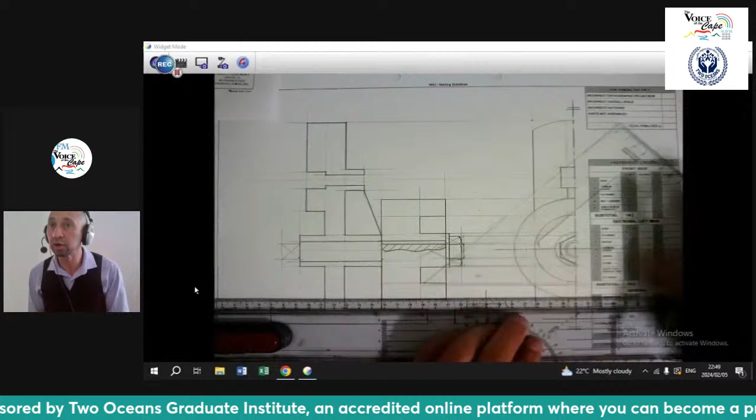And please, people, this is a very delicate construction. You need to ensure that you know how to draw a nut or a bolt. It's very important. And if you don't know, I would advise you to go practice, because there's definitely going to come in the exam a nut and a bolt, or a bolt. And the construction of both would be the same, okay?

And then, of course, once that is done and the shaft is there, we are going to add the other components, which is that part that you will see there with the spring, which you're going to put in there in conventional format. There it is. And that crossover there is the cross flat that we have on a bolt.

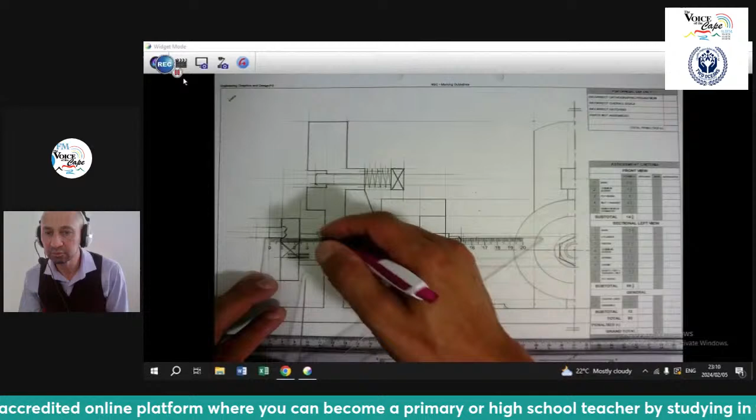And then we continue by adding the part at the back there, which is my piston. See there, I constantly refer to my instruction page for the dimensions. And then I add my piston, and my piston is in its highest position. And then the part that comes over the piston will just be added, making it very easy to slot in here, covering the piston and the inside. Nice and strategic planning allows you to actually fit in all the components as it is on my drawing.

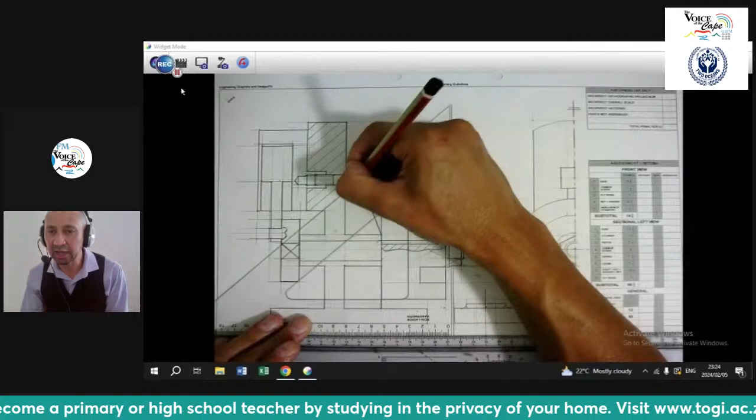And then once I have all my components nicely fitted into each other perfectly, I'm going to start with my hatching. The only things that will take hatching would be my main component, as I have there. And then you will also have your pulley or your wheel in a different angle. And then you are going to have that component here, added to your piston. That will be in a different format of hatching. And the different components will of course take different hatching.

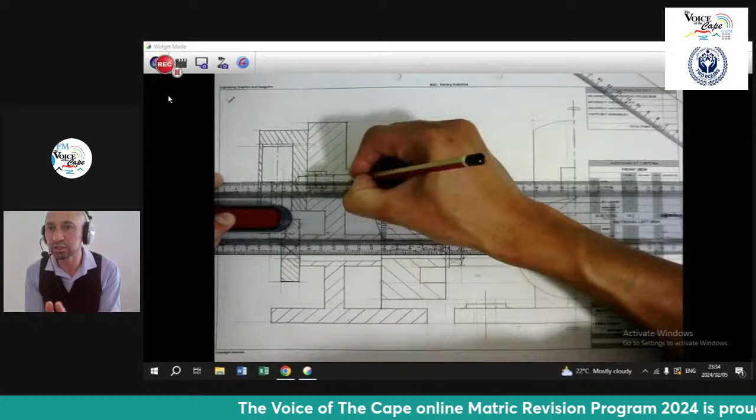Now I just want to pause on the hatching part here and explain a few things before we exit this drawing. Very importantly, learners, you must do your hatching of different components in different directions. So there's 45, there's 60, there's 30. You can use all of those. You can cram the lines closer together, or you can spread them apart. The bigger the component, the more you can spread the lines. The smaller the component, the narrower the lines are packed together. And you can have different angles of the line to make it clear that you are cutting through different components.

And that's very important. And then, of course, people, center lines. Wherever there's a center line on a component, you have to put it in. There's almost 7 to 10 marks allocated for center lines only. And you know that we work in half marks, so if you have 7 marks for center lines, there will be literally 14 different center lines on the drawing.

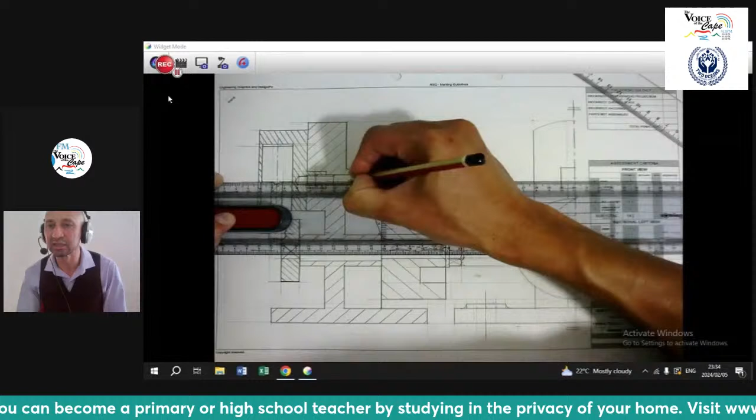And you need to find them and put them in, even if you play the guessing game, because the center lines count quite a big chunk of the mark, almost up to 10 marks. If you leave them out, you are missing out on 10 marks. So do not forget to add center lines. And if there is a requirement for a cutting line, please make sure that you add a cutting line as well. And the cutting line arrow will be on the side that has the actual section.

It won't be facing the section on that side. It will be on the side here that will have the cut section facing away from the cut section. So that is where you put in your cutting line. And make sure that you label it AA, BB, or CC, whatever it is. And both the outlines, the 2 lines where it starts and finishes, must basically be drawn slightly darker than the rest of the line.

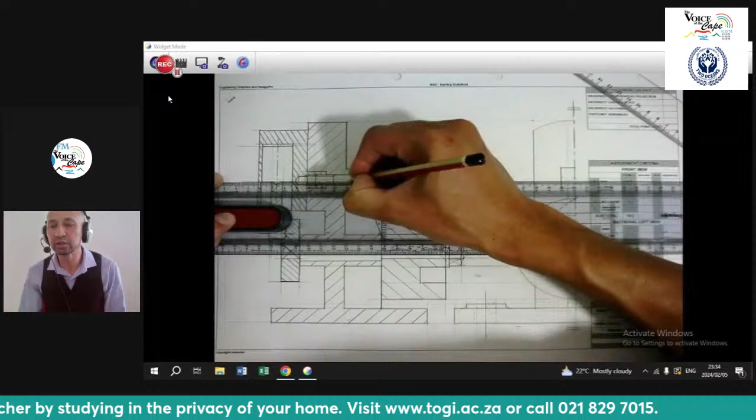So those are all little tips that you need to really get a hang of this drawing, and get the maximum marks out of this particular assembly drawing, because it has a mark magnitude of 90 odd marks, which I said at the beginning, slightly short of 50%. And if you can do it really well, you will be close to halfway through your marking of 200. And if you add the analytical, it will definitely push you over 50%.

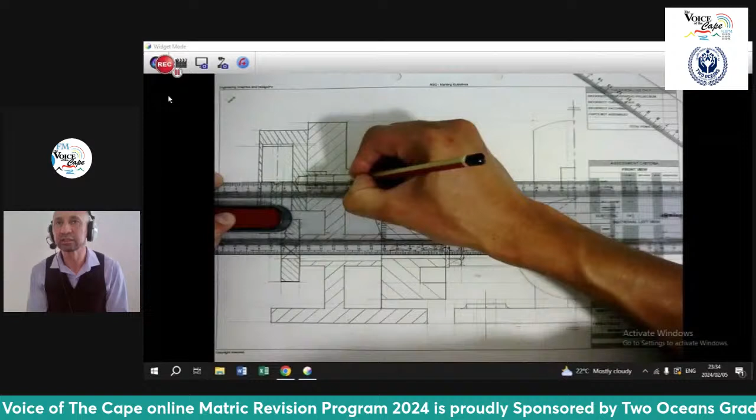So spend a little time to draw 1 or 2 of these in your days leading up to the exam, and make sure that you understand it well. The concept is very important. They will give you different components, but there will always be a nut, a washer, a bracket, a pulley. Those are common things. Just the shape changes every time, but the concept of knowing how to do it will make it easy for you.

And just remember, last thing, if you can't put it together the way it should be, just attempt it in your own way. I promise you, there's marks allocated for putting it together, maybe penalizing you 1 or 2 marks for not putting it in the proper position, but you will still be rewarded for the components, the lines of the components which you have drawn.